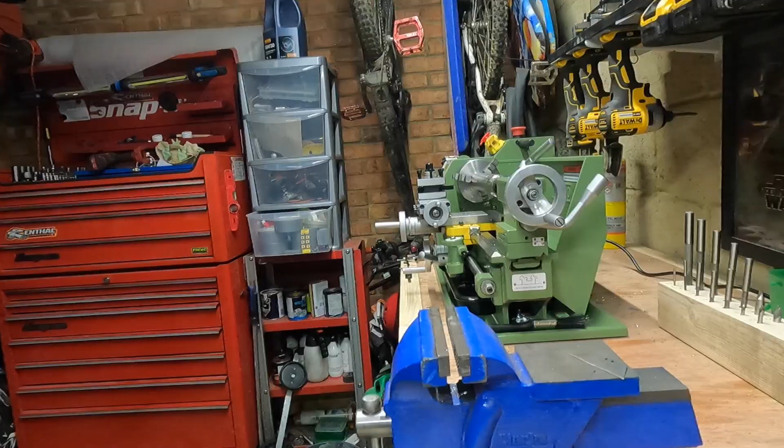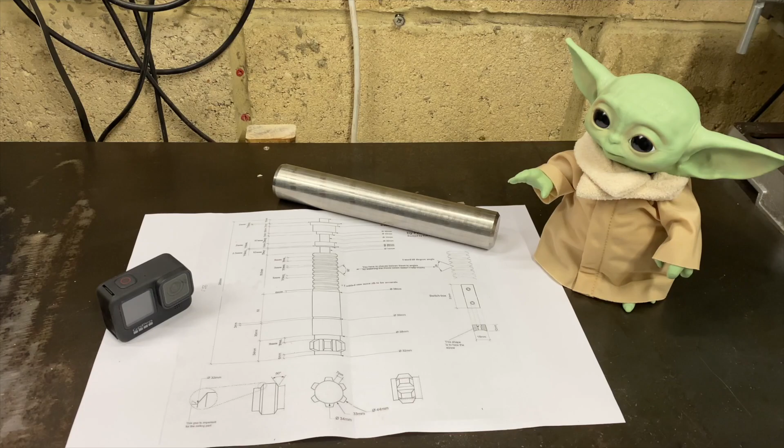Stop right there. So today, like any other day on this channel, starts in the workshop. And today we're going to be focusing on using the force. No, not that force, Grogu. The force of the lathe.

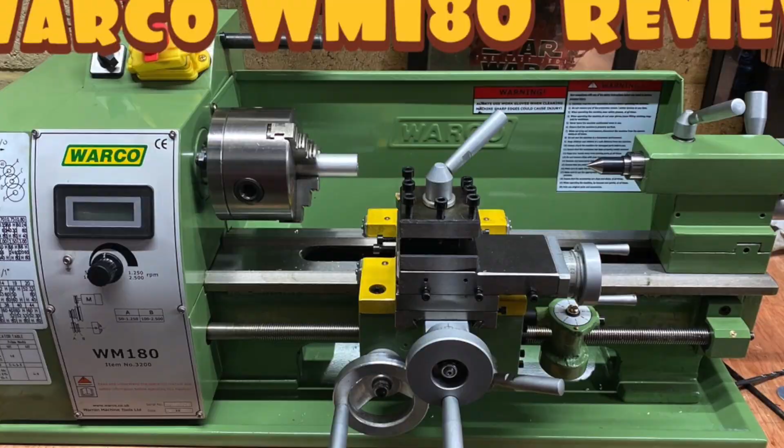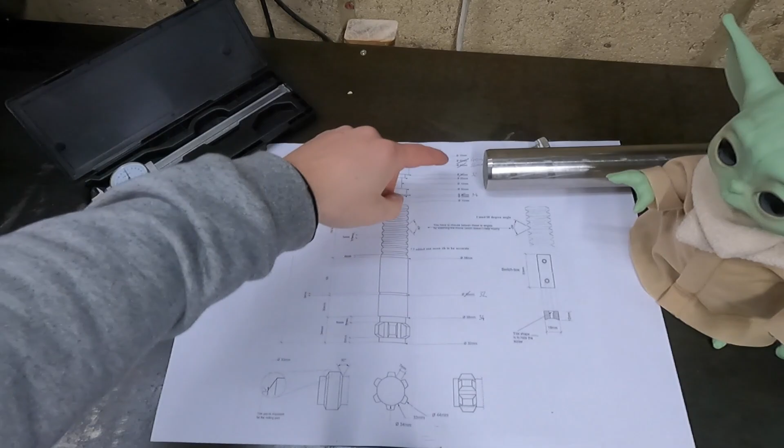Ooh. So I want to today start to progress on making my own lightsaber on the lathe. I've acquired this very nice bit of stock, and hopefully today I'm going to be chucking that up in the lathe and starting to make Luke Skywalker's lightsaber from the original Star Wars movie. Due to the size of stock that I've acquired being a little bit smaller than what I need for the scale drawing that I've got, I've had to sort of scale all the measurements down, but I think this is still going to work perfectly.

Because on the sketch, the widest part of the lightsaber is 50mm, and unfortunately my bar is 40mm. So I've made the widest part of the top 40mm and sort of scaled the handle and everything else down to suit. Hopefully by the end of it, this should work out really well. So what we need to do now is get the bit of stock, chuck it up in the lathe, and see what runout we've got, see if we can start making some chips.

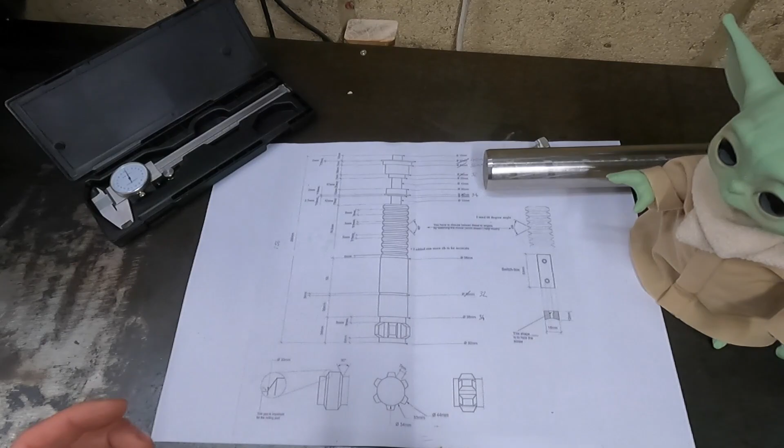So I've got this bit of stock in the lathe now, and I've got the runout the best I possibly can, given the fact that this bit of stock is pushing my lathe to the absolute limit. Like my tail stock is even hanging slightly off the end. It is secure, but like I say, it's hanging off the end. So I've made a mark, which is about here.

So I need to take all this bit of material down to a diameter of, what have I marked it at? Right, 34mm. So all this has got to be taken down to 34mm. It's currently at 40mm now, so it's going to be quite a long process to take all this down by 6mm. But might as well get on with it.

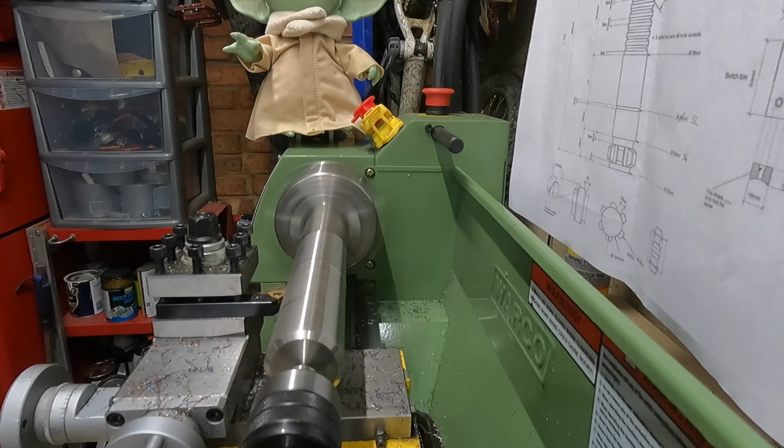Just a quick update then. So I've actually changed cutting tools. The cutting tool I was using previously was making really awful chips, getting all stringy and just ruining the finish of the work. So I've changed for this square insert. I'm keeping with the carbide tooling because it seems to be cutting this, you know, half decent. So yeah, I've just got to carry on now. I've got to take about another 3mm off of this, and then I can start adding in some nice little features.

So we're just coming up to the last couple of passes now, and then we'll reach final outer diameter. That last pass, for some reason I picked up a little bit of chatter. I don't know if I maybe went a little bit too deep on that last pass. So now I'm just going to do one more plunge cut, just to give myself another gully for the cuts to sit in really. Makes life a lot easier. I'll just do this up here. Locking the carriage down so it can't move around.

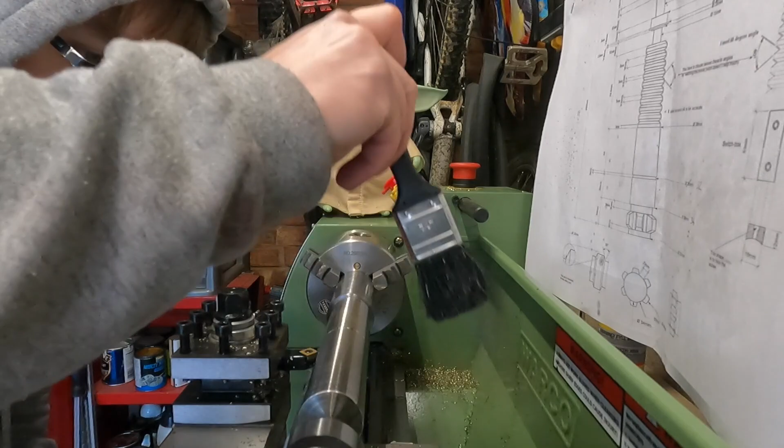Unfortunately, it doesn't actually give a measurement on my drawing of how deep to go. Right, I'm going to push it and go to 3mm and see how that looks, because at the minute it doesn't really look like much of a groove. So we should be coming up to touch just about now. Lovely. Perfect, that's just how I wanted that to come out.

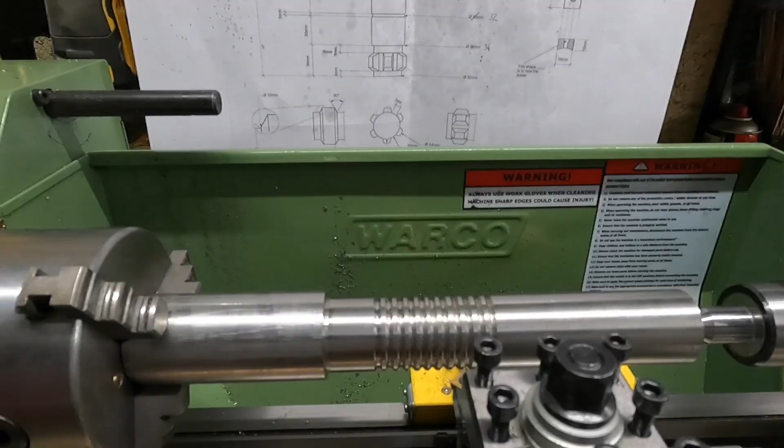Right, I've got all the grooves now cut and done in there. In fact, it turned out really simple how I was doing it in the end. I was basically plunging 3mm with this 90-degree tip that I had on there. And once I got to 3mm, I was just retracting it, moving over 5mm I think it was, then plunging in again, and that gave me this really nice groove pattern.

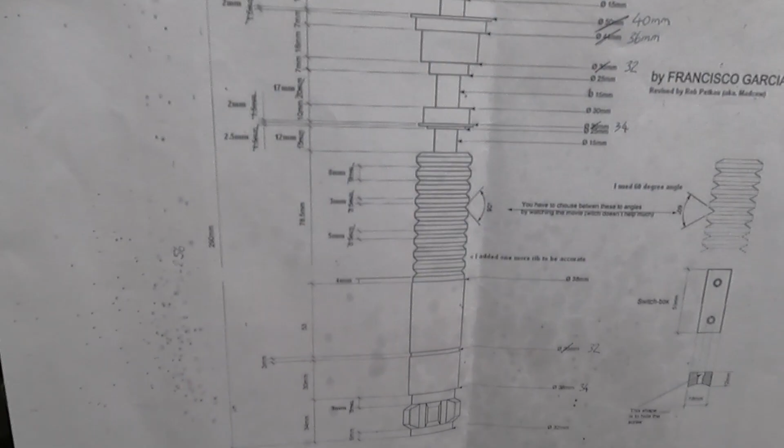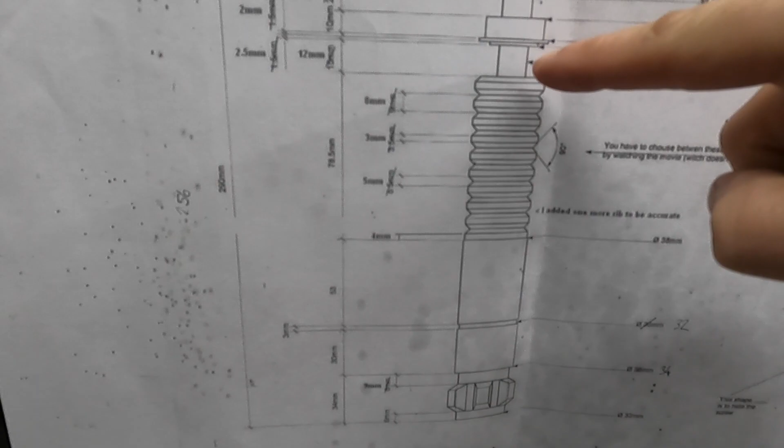So there's one more thing I'm going to do on today's video. Obviously there's no way I was going to be able to cover this all in one video, but moving back to the drawing, we've now got the handle with the grooves on. I now want to do this little bit here, so that means taking off quite a lot of material. But luckily it's not a very big bit, so hopefully that should not be a problem. So I'm going to do that, show you the final result, and that will finish up today's video. But for now, let's get on with that.

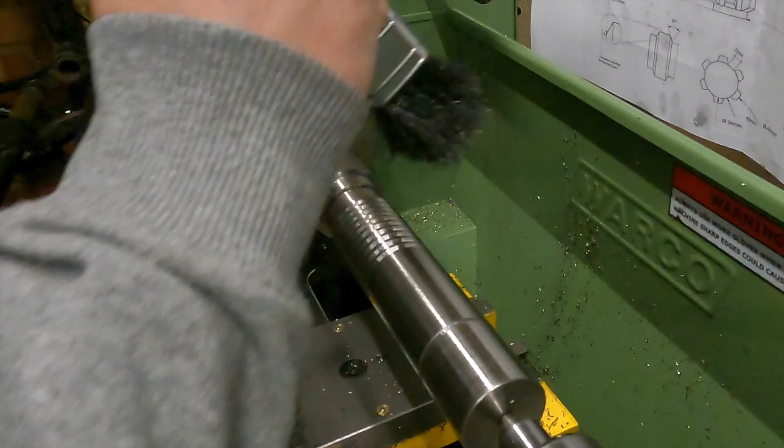Unfortunately that's as much as I can do today. Where I'm going really deep into the metal now, I need a cutting tool with a really acute angle. All the tools that I have are mostly 90 degrees, so I need something with a 60 or 45 degree cutting angle just to get really deep into that groove there. Basically, I need a really small tool. So I have ordered one, but it's not going to be here for this video. So the lightsaber is going to roll over onto a part 2, which will come out in 2 weeks' time.

So I hope you've enjoyed this video. It's something different. It's something using the lathe, which really interests me and I think is a really cool bit of kit.